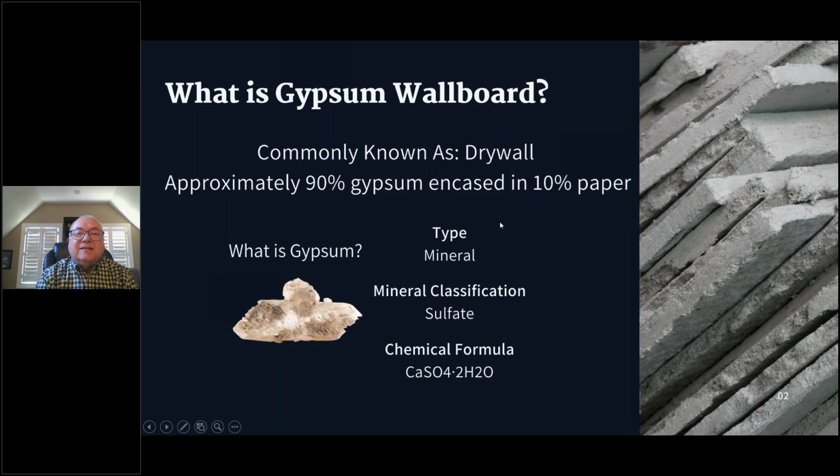So how much comes to our landfills? As I mentioned before, we have 3 landfills, of which the Southern Solid Waste Management Center has the most C&D material come to it in relation to the others, so I thought I'd present the information regarding that landfill. It serves the southern part of the state of Delaware. The total waste we received in calendar year 21 was 325,850 tons. Of that, C&D comprised about 108,710 tons, so roughly a third of the material we receive at that facility is C&D. The other 2 landfills in the northern part of the state receive between 10 to 15% C&D material. So that's why I chose this one, and this is the site that has posed us the most issues.

In 2015, we conducted a waste characterization study of just the C&D material coming to this landfill. The study identified that the gypsum content of C&D was about 7%, which would translate into about 7,610 tons in a year. We were only able to recover approximately 728 tons, a little less than 10%. I will go into further slides to describe what we do.

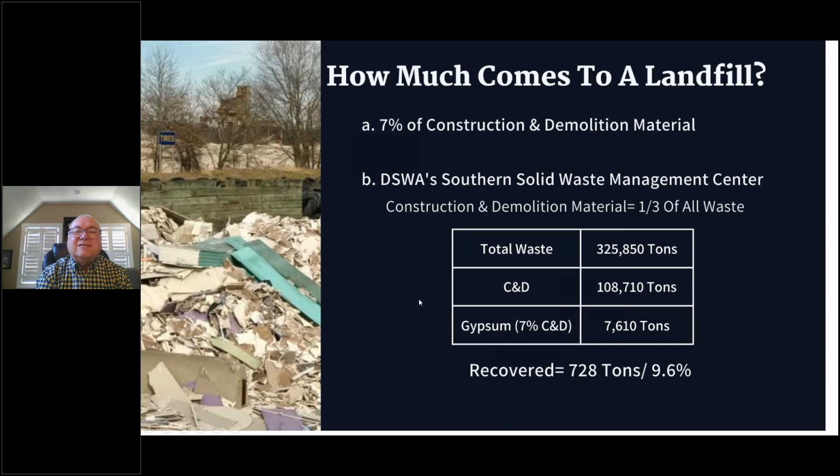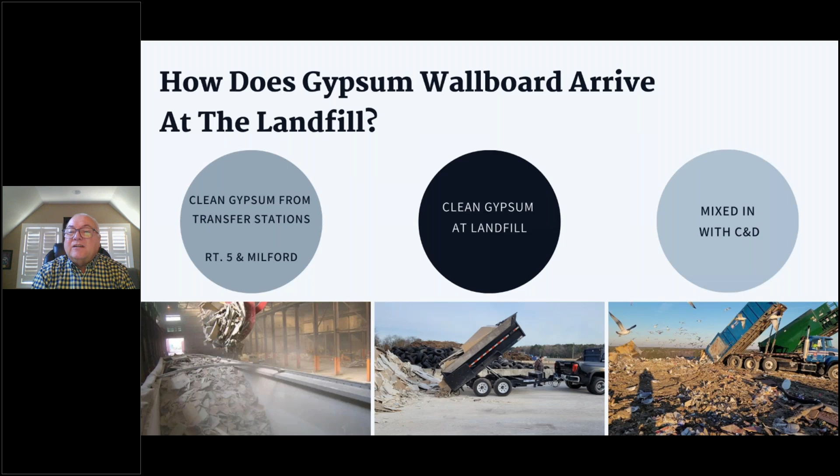But first, how does it arrive at our southern landfill? We have 2 transfer stations in the southern part of the state, and they receive clean gypsum. They have drop-off spots for just clean gypsum wallboard, then it's put into transfer trailers, and the trailers come to our southern landfill, where the majority of it is accumulated in one place to make it more efficient for shipping. The clean gypsum coming to our landfill directly is unloaded, as you see in the center picture. We will describe that a little bit more. The majority of it comes mixed in with the C&D loads, which are emptied directly on our landfill, as you see in the photograph on the right.

So, problems that it creates at landfills. A minor problem is that it takes up valuable landfill space. In the big picture of things, that's a real problem; we don't want to waste our landfill space on something that could be recycled. But the major problem is that gypsum in the landfill environment produces hydrogen sulfide gas, which is toxic, flammable, corrosive, and odorous. By landfill environment, I mean it's landfilled with MSW, and as you can see in the picture, it's very messy with all kinds of things in there.

In the landfill environment, there's a lot of moisture. When you're out in the open, it rains from time to time and that rainwater percolates down into the waste. You also have anaerobic conditions within the landfill. You have a lot of organic material; MSW contains a lot of organics, including food waste. And then you have bacteria. The combination of all those things produces landfill gas, and the landfill gas has hydrogen sulfide within it, which is toxic, flammable, corrosive, and odorous.

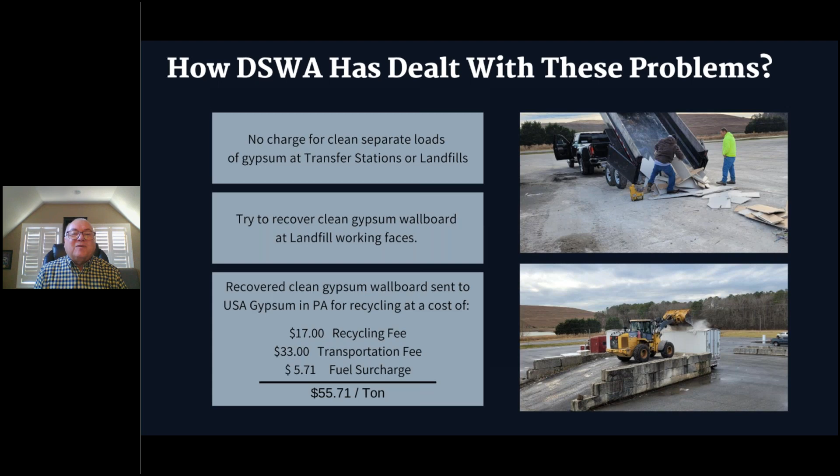Their facility is located in Pennsylvania. We're in southern Delaware. It's about 150 miles one way for that trip; that's why the transportation fee is on the high side. How else do we deal with problems? Well, we try our best to accelerate the collection of landfill gas, which of course contains hydrogen sulfide. In a typical landfill, you're going to be generating landfill gas anyway. When your municipal solid waste is decomposing, it produces it.

So accelerating it means that as soon as it's physically possible to install a landfill gas collection well, that is what we try to do. But you need to have a certain amount of waste in place to make it effective. Because if you put in a gas system and start drawing a vacuum on it too soon, too strong, you're going to draw oxygen into the landfill. And that's a dangerous situation, which could cause a landfill fire internally. So you have to make sure you've got a depth of typically about 20 feet of waste and soil before you can effectively draw landfill gas without drawing oxygen from the outside air into the landfill.

The other thing here is that we have a treatment system. Once we collect that landfill gas, which contains the hydrogen sulfide, there's so much of it that it's going to damage the engines and also cause a problem of excess air emissions from sulfate. We use a media, and the media we used in 2017 cost us $1.4 million, just the cost of the media, which is an absorbent to remove the hydrogen sulfide.

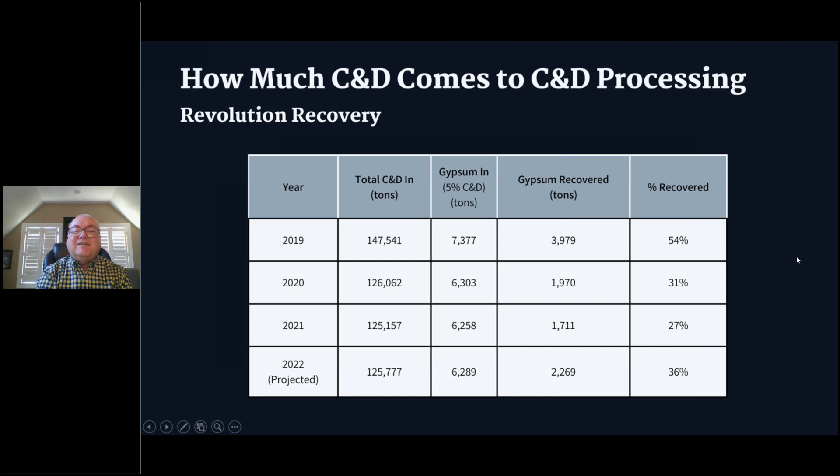And here's some most recent data from 2019 through present. You can see they process over 125,000 tons per year. When they've done an evaluation of their gypsum content within their C&D tons, you can see they have roughly 5%. And since they have a processing system with a lot of labor and equipment, they're able to recover a much higher percentage, still not as high as everyone would like, but still very good.

So how does gypsum wallboard arrive at their facility? Mostly by roll-off truckloads, as you see on the left. That particular one is mostly drywall, which is good. And it goes over to the area on the right in the picture. And what their process is, loads that are highly wallboard, that would be 30% plus wallboard, they put in a pile over there. But as you can see from the photo there, it's got a lot of other stuff in there that's going to have to be removed.

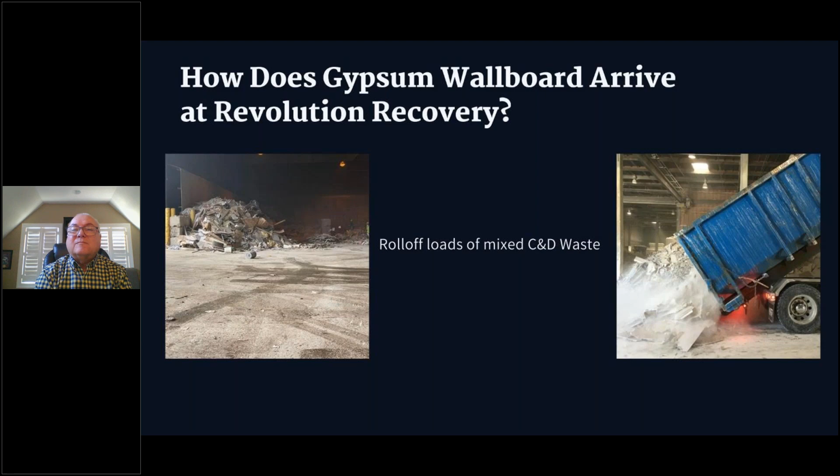And then for loads that have less than 30% wallboard, they process it just for their C&D operation. And it goes over on the right-hand side for a loader that puts it into a finger screen. It screens fines out from the bulkier material. It goes up onto the upper level there where we have hand picking of the recoverable material, a lot of wood, metal, and other items.

And it's very difficult to remove from mixed loads because in that mixture, as it goes over a finger screen, any wallboard that might be in there gets broken into small pieces and ends up in its fines. And when it goes into the fines, it's contaminating them and it limits the end markets for those fines. Many of the landfills don't accept contaminated fines for disposal, but there are a few that do, and that's where some of them go.

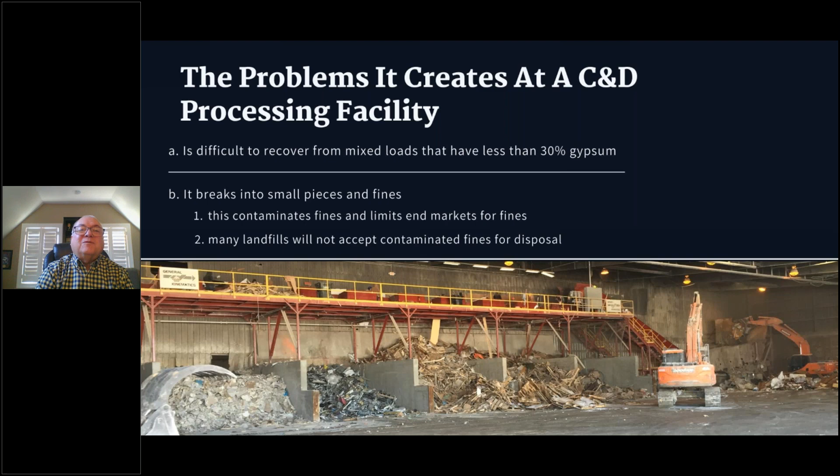On this one, like I said before, they only sort loads that have more than the 30% gypsum, and they encourage customers to pre-sort their loads and use a LEED program. The sorters here are on the floor, really a tough job to hand pick stuff out. And if they're short on sorters, they have to focus on the money generating material up on the platform that I showed in the previous slide.

So it's an economic burden for them because likewise, after they separate it out, this recoverable material has a cost to get up to a recycling facility, and they go to the same USA Gypsum facility in Pennsylvania as we do. And again, their main operation is trying to recover wood and metal and other things that have value. And so it's less desirable.

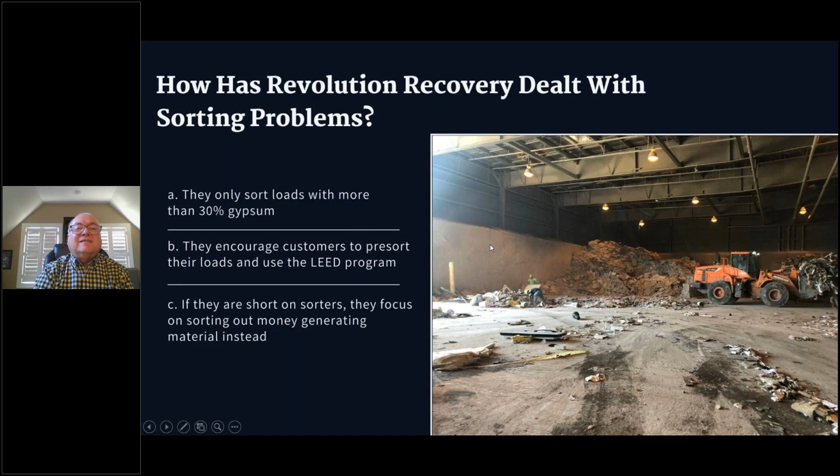And then Revolution Recovery, like I said, their best end market is USA Gypsum up in Pennsylvania. They're constantly looking for end use disposal markets for the fines. And some end uses can be used as a landfill capping material or a fill material, as long as it's confined within itself so that it's not exposed to moisture and organics and bacteria. It might be suitable for that, and it's on a case-by-case basis.

Disposals to out-of-state landfills with the fines mixed with all the other residuals is another method that they've found not as desirable, obviously, but that's what the current market shows they have to do. And then we get down to recommendations. How can we be better at this? Well, here's a few suggestions.

First is to require wallboard manufacturers to have a minimum percentage of recycled content in their wallboard. Another would be to require all new building construction to collect scrap clean wallboard separately and direct it to a recycling outlet. A third option, regardless, is to improve the infrastructure. We could use more transfer stations, or the existing transfer stations need to expand their floor space so that you could receive and sort the stuff.

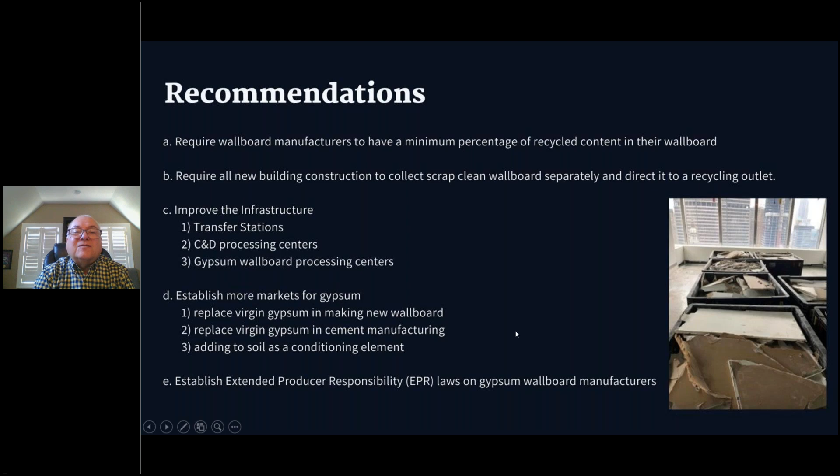And then lastly, the big one is establish extended producer responsibility laws for gypsum wallboard manufacturers. An issue with that too, of course, is that if you have individual states doing this, and we have interstate commerce going on, it's tough. Something like that, in my opinion, would be better if we could do regional or national things so that everybody would have a level playing field.

Another is the Construction Demolition Recycling Association. They have standard specifications for the production of recycled gypsum from scrap gypsum drywall. And then lastly, NEWMOA has a policy options white paper that's a good source of information regarding this subject. It's a little old, September 2010, but it is a good source of information. And I would encourage people who are interested in the topic to look it up.

And that's my presentation, and I'm ready for any questions people may have. Great. Well, thank you so much, Rick. And yes, like I said in the beginning, NEWMOA has been focused on C&D for quite a while, and gypsum wallboard has been a problem material for quite a while.

So we do have a few questions. One is sort of a fundamental one. If you could talk a little bit more about clean, like what do you mean by clean, and what other kinds of gypsum wallboard are there? Right. Yeah, this clean is just what it sounds like. It has nothing on it. It hasn't been used. So clean wallboard is from construction. So as a new home is being built and they're installing the drywall, they cut pieces of it to put up, and it's these scrap pieces that are clean that will come to us.

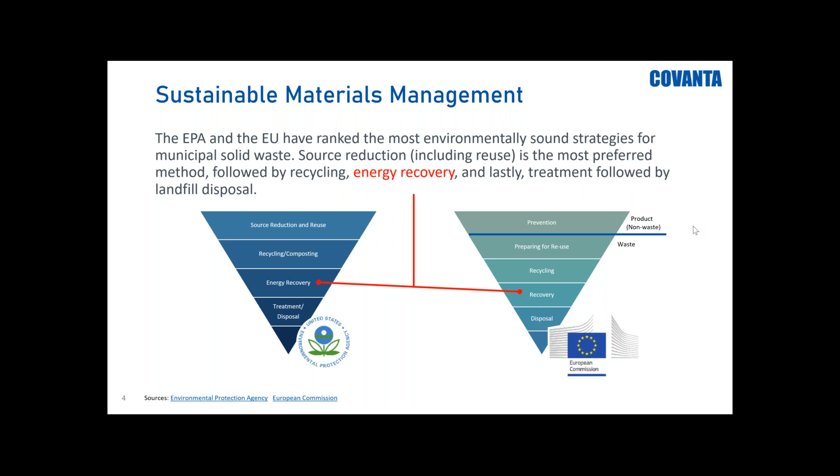This is the sustainable materials management hierarchy, showing what the US EPA and the EU rank as the most environmentally sound strategies for municipal solid waste. Source reduction, of course, which includes reuse. The most preferred method following recycling is energy recovery. And lastly, treatment followed by landfill disposal. As Rick alluded to in the last presentation, landfill disposal is still in many ways preferred in the US. We'll see that in just a moment.

The two choices for disposal: landfill, as Rick pointed out in the previous presentation. However, landfills are a major source of man-made methane. Methane is 30 times more potent than carbon dioxide. They do have leachate, as Rick talked about, and groundwater contamination can occur in older landfills.

It's not a sustainable use of the land, and even though there is a gas power production component, it's far less than waste to energy, which can take 1 ton of MSW and reduce it by up to 90%. It's a clean base load of power generation, and again, we recover metals. And what's not on here, oddly enough, we actually recover money, coins, and we're not allowed to resell those. They actually go back to the Federal Reserve through reverse auctions when available.

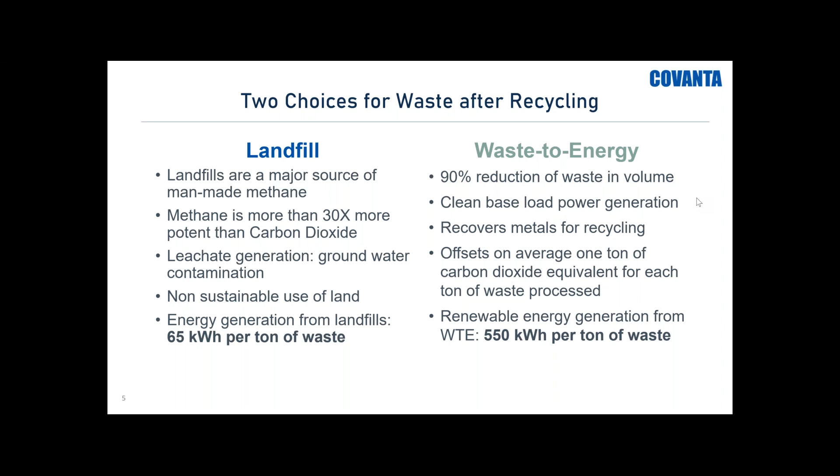So the U.S., how do we rank in terms of what we do with our disposal? And this includes C&D. The U.S. is primarily landfill. The EU average, you see the energy from waste and the recycling components eating into that preferred method of landfilling that the U.S. has. Denmark and Germany, as a percentage, overwhelmingly energy from waste, and that's driven through public policy in a lot of ways. But again, the U.S., we still have a lot of land out there, and landfill is preferred in a lot of ways.

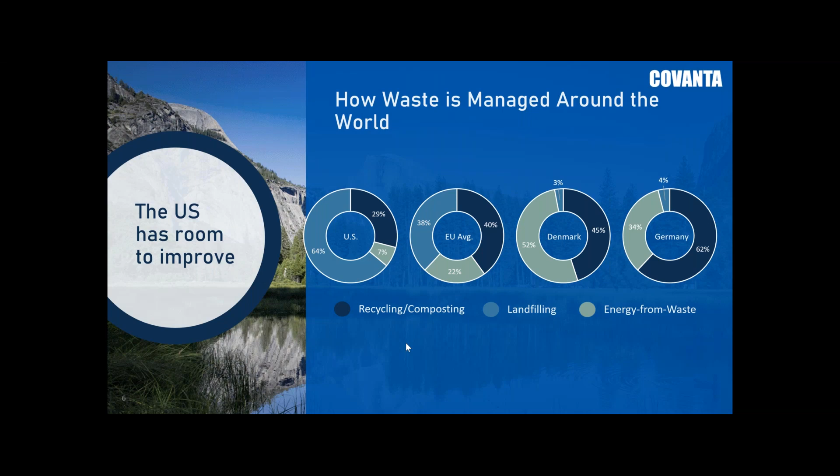Transfer stations support a lot of our facilities as feeders. We've got over 1.8 million processed tons annually. 900,000 of those enter through our transfer stations and then are redirected. And as it relates to the subject matter that we're here to talk about, it's interesting to know that we do not accept C&D at any of our facilities, with the exception of our Holliston transfer station. And like Rick had said, there's not a lot of places to take that. So at our Holliston transfer station, we actually truck that out of state to a certified facility that will take that C&D and process it to their specifications.

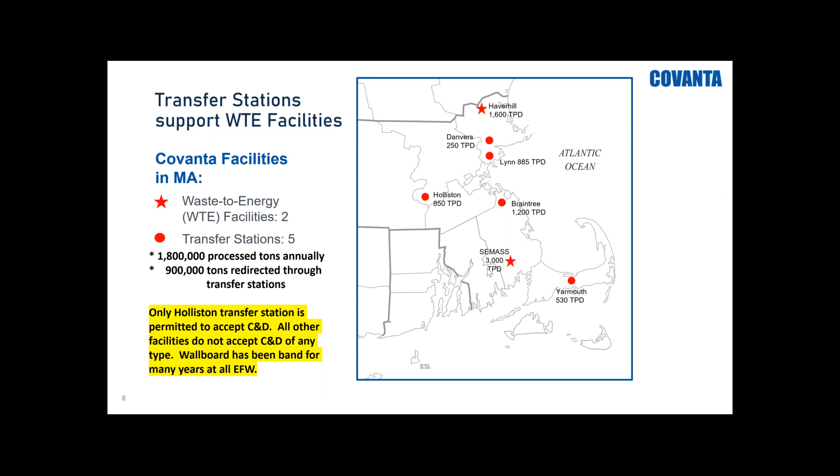Other than that, we do not accept any C&D, any wallboard, and it's been banned for a number of years for the reasons to follow. What's the main problem that we have with gypsum wallboard specifically? First, it's the sulfur content that Rick had pointed out. It creates SO2 emissions. In order to combat those SO2 emissions, we've got to increase our chemical reagent, in particular lime. Also, as Rick showed in one of his photos, it's dusty when it's all broken up. Other than the paper on the outside, it doesn't burn. It gets crumbled up and becomes particulate matter for us, dust.

All of that ends up in our ash and increases our ash cost. So it's a problem from the time it comes to us, which again, we do not accept it. However, in the market conditions out there today, dilution is the solution, and where they can't get rid of it, somehow it comes to our facilities, even though we prohibit it.

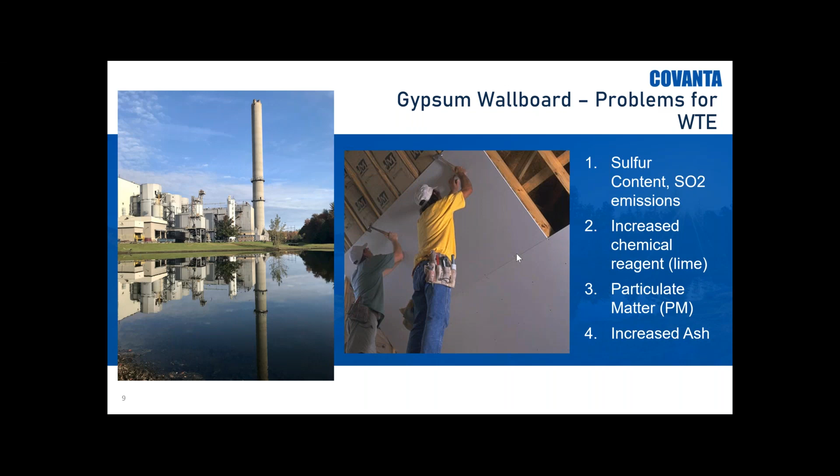Sulfur content, SO2 emissions. Gypsum wallboard is mostly calcium sulfate mineral combined with a thin paper coating, as Rick had alluded to. Sulfur in the wallboard directly increases our sulfur content in normal MSW trash. It actually adds to the sulfur content across the entire ton when mixed with MSW. Sulfur in the MSW is converted to sulfur dioxide flue gas emissions when combined with the heat from the boiler. Increased SO2 emissions are a real problem for us. SO2 is a regulated US EPA criteria pollutant.

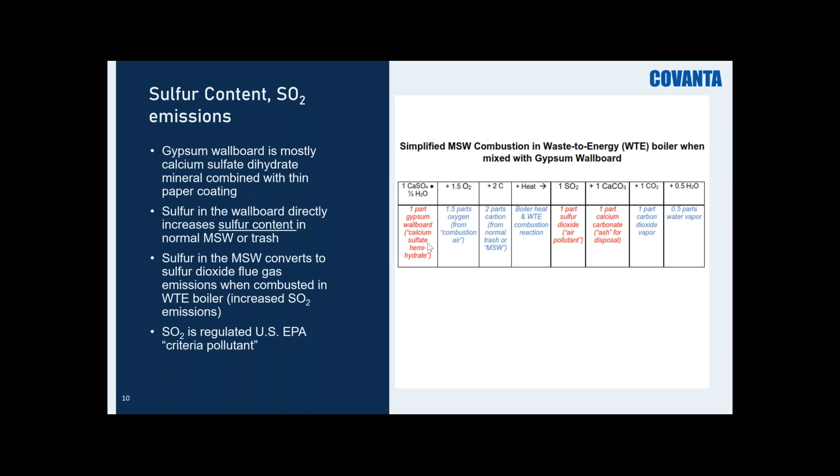The simplified MSW combustion, which isn't very simplified here, breaks down as 1 part gypsum board, 1.5 parts oxygen, 2 parts carbon, combined with the boiler heat and combustion, equals 1 part sulfur dioxide, 1 part calcium carbonate, and 1 part carbon dioxide vapor with 0.5 parts water vapor. Not very simplified, but that's the science behind it.

So at all of our facilities, we have CEM systems, a continuous emission monitoring system. And this is a full year snapshot of our SEMASS facility that does over 1.2 million tons of MSW annually, tracked at an hourly concentration. And as you see here, during our tracking, there's spikes. And for every one of these spikes, we look back to see what we're refeeding, what we're reprocessing, what came in during that time frame. And oftentimes what we find is not a clean load of gypsum, but heavy concentrations of pieces of gypsum, and more importantly, the powder in the middle between the paper, to where somehow that material came in and was fed in large batches.

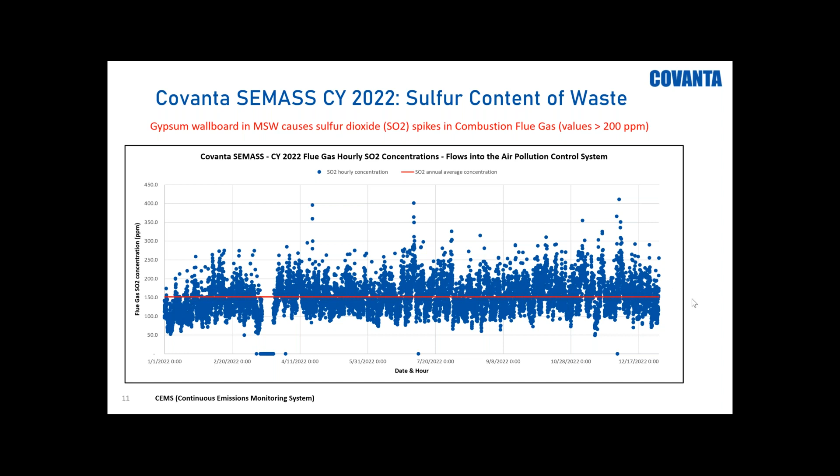It's not 100% attributed to wallboard, but it is a leading indicator that we're taking in material that could be associated with diluted MSW with wallboard and C&D components in it.

The increased chemical reagent, lime, what do we use that for? You'll see here that through the spray dryer absorber, we use that to scrub sulfur dioxide and acid gases out. You'll see the red line, the flue gases going in, and at the top it's creating a lime slurry that is encapsulating the sulfur dioxide and other acid gases, falling to the bottom, and is going to be collected into our ash system. From there, the flue gas goes to our baghouses at our facilities. I'll show you that here.

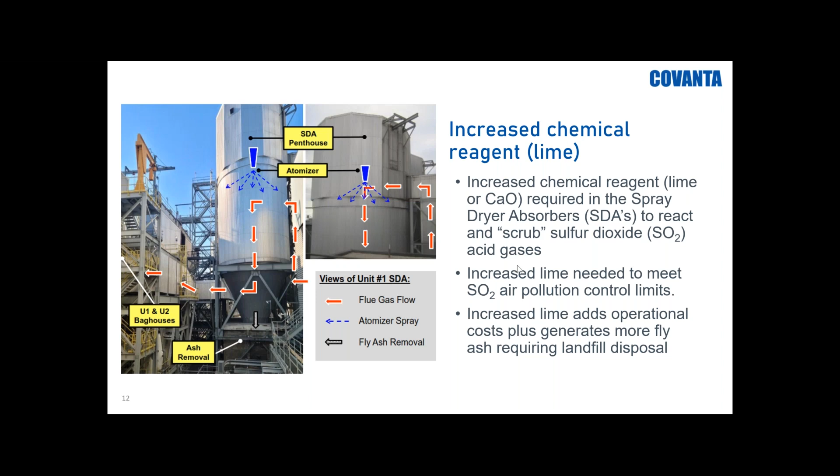This is typical of what a bag house looks like. These are just large steel framed boxes with hundreds and hundreds of large industrial, I'll call them vacuum cleaner bags, whereby the flue gas goes to the vacuum cleaner bags. Whatever particulate matter is in the flue gas gets stuck to the outside of the bag. The clean air, the flue gas without particulate matter, goes through the inside and then back out through our

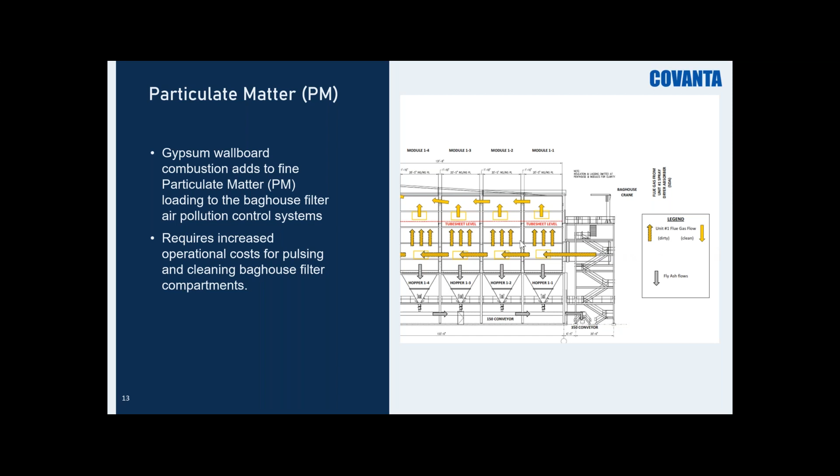stack. And all of that particulate matter that gets collected on the outside of these bags gets pulsated and vibrated and then falls to the hopper bottoms, and then gets conveyed out and is also collected with our ash. So we're creating ash to abate our environmental liabilities associated with wallboard.

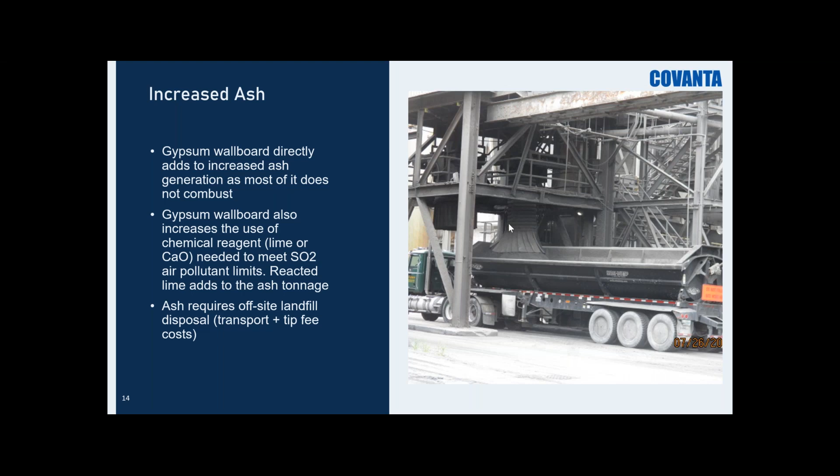So again, here's a shot of our ash loads. Gypsum wallboard directly adds increased ash generation, as most of it does not combust. Gypsum wallboard also increases the use of chemical reagent that we spoke about, and ash requires off-site landfill disposal. There's a tip fee and a transportation cost. There's also a long-term liability cost associated with ash disposal.

So what do we do about it? Promote C&D recycling diversions and facility siting. We'd love to see more C&D facilities, processors in the Commonwealth or around the Commonwealth. Work to restore market balance in the C&D world. C&D processing and recycling should be cheaper than MSW processing. I think in Rick's slide, I thought it was very interesting that clean was almost free, if not free, versus mixed was expensive. So working to restore that market balance makes sense.

Working with C&D generators, haulers, processing facilities, outreach, inspections. As you can imagine, we have daily, weekly, monthly inspections internally and externally, and yet we still see this waste coming to us. In many ways, it's coming with roll-off trucks, as Rick had indicated. But moreover, we're also seeing it in mixed loads of 100-yard transfer trailers, which is very hard to catch that C&D, and in particular the wallboard, after it's already down to 6-8 inch chunks and mixed with 25 tons of trash.

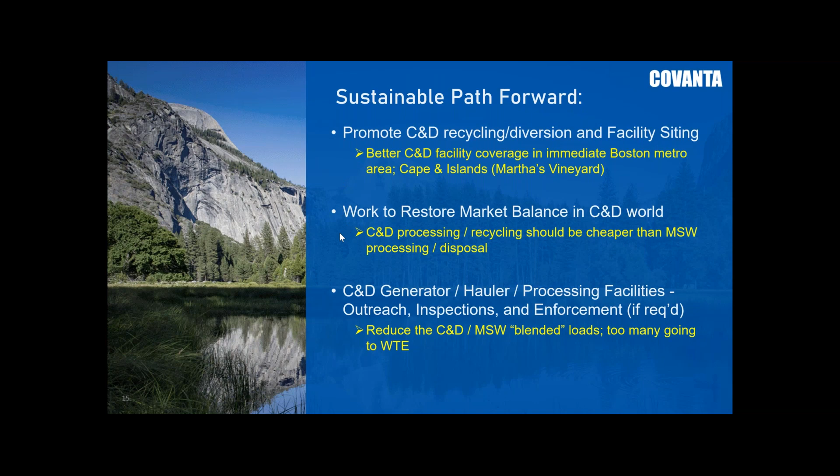But we do it every day, and we will continue to do so, hoping that there'll be more solutions along this notion of having more places to go that are hopefully closer. And that's what I have for today.

There we go. Okay, there we go. Thank you so much, Mark.

I am not seeing any questions specific to waste to energy here. So does anybody have any questions more about what happens at waste to energy facilities? So basically, you all don't want it. You say it's not allowed, but it still comes in, because it's mixed in with other stuff, and with demolition and renovation projects, and maybe even some new construction, it can get made into smaller pieces. It doesn't come as a big board that you can easily identify. So please don't bring it.

So let's see, here's a specific question. When you see a spike, do you try to go back and figure out where that waste came from, and then get on those people to not do that again? I would say when we can, and when we notice that in real time. We actually have cameras and we can go back and review. We'll look at the actual pit or the floor volume to see if the material has substantially changed. And then if we know, based upon that location and where that waste was that day, we can go back through the cameras and look.

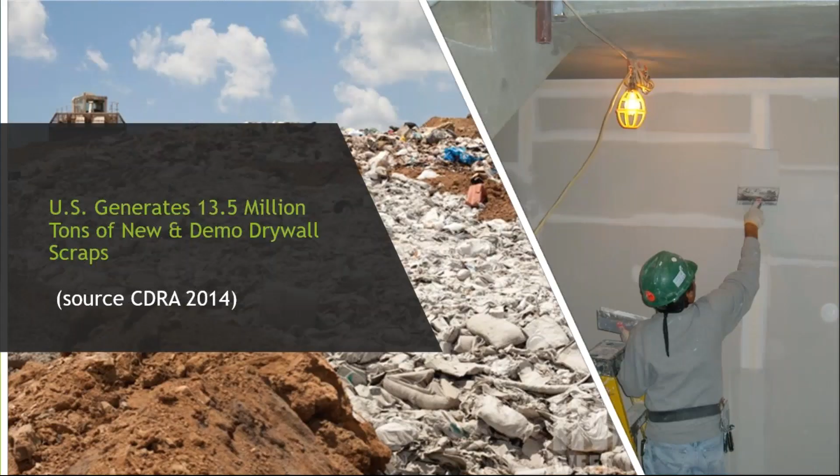So it's always interesting to try to figure out how much drywall scrap there is out there, and I could find various studies to support a wide variety of volumes that I wish to recommend as reality. But the CDRA did a deep dive with University of Florida back in 2014. And that estimate was 13.5 million tons of new and demolition drywall scrap.

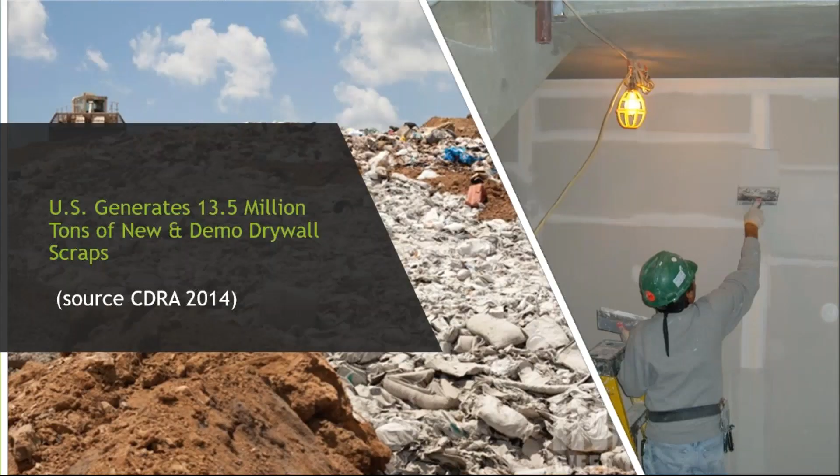So if we jump back a minute, whoops, I went the wrong way. If we jump back a minute and we look at that 42 million ton supply, 13.5 million tons of waste going into landfill could have a significant impact on that supply if it could be reclaimed.

Let's talk about gypsum drywall volumes in the Northeast. I think the most reliable way to evaluate them is look at how much drywall is sold into the regions. The USGS combines New England and Mid-Atlantic together for the NEWMOA states, and Pennsylvania falls into that even though it's not a NEWMOA state. So combining the two, there's 3.23 million tons of new drywall that were sold into the New England Mid-Atlantic states in 2021.

If we subtract Pennsylvania out, I think we're at about 2.58 million tons for the NEWMOA states. And if we use a 15% waste factor, that would come up to 387,000 tons of new drywall scraps that are generated from the NEWMOA states.

So another important question is, well, how much demolition is there? And I'm not even going to project an estimate here because there's really not much reliable data. Some of that's because of how the waste is generated and handled. And there's just nothing out there, but I think it would be fairly safe to say that it would be at least equal to the amount of new drywall scrap that's being generated.

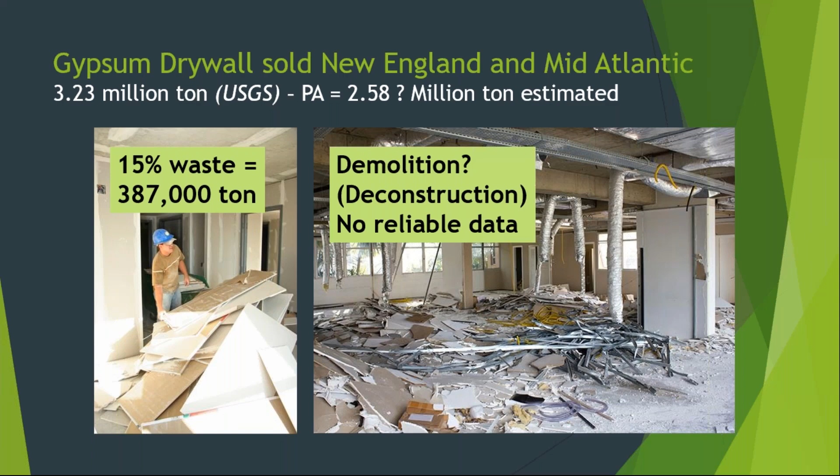So how did I come up with these different numbers? Well, I took the total amount that was shipped and I broke it down by population, and in that chart you can see how much that amounts to on a population basis for each individual state, and then totaled that out. So there again, that's where the 387,000 came from, rounding my number to the far right in the bottom.

And based on that, we pulled about 5,000 tons out of the NEWMOA states in 2022. So if my estimate is even close to being correct, we could be at a 1.3% recycling rate on the new drywall scraps being generated in the NEWMOA states.

It's interesting to note that the NEWMOA 2010 study, which is a great study, estimated the Northeast at 720,000 tons of new scrap being generated. And their method was using a waste characterization study and then spreading that out across all the C&D tons that were reported. So that was their methodology, and obviously you can see that it's nearly double the amount that I think is a fairly reasonable estimate of the volume.

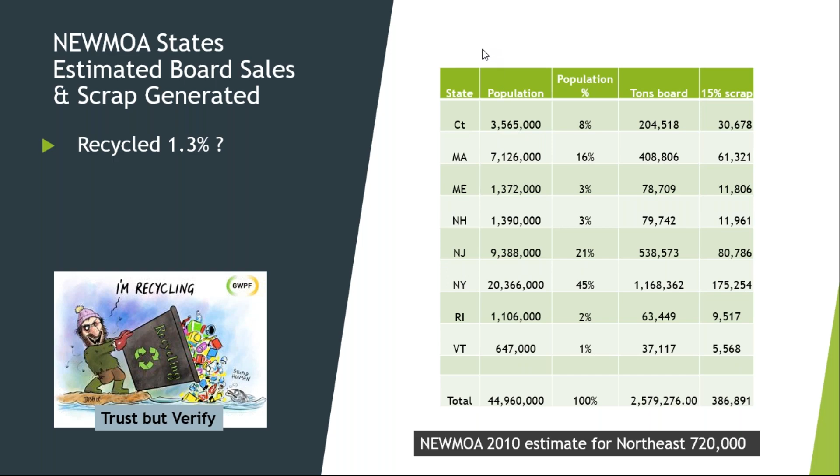Jennifer, can you hear me? Yes, I can hear you. Okay, my screen froze here and I can't move. I may need to go out and come back in. Well, or just try clicking on your slides and then maybe you can move them. Oh, there we go, thanks for your help. Okay.

So what about the drywall scrap outlets in New England or NEWMOA states? We've been in business since 1998, although we weren't operating particularly in the northern states. We were probably over in New Jersey early on, but we had Gypsum Recycling America open up in Boston back in, I believe, 2006, who couldn't make it work and exited the stage, unfortunately, back in 2010.

We started pulling drywall out of the NEWMOA states pretty aggressively around 2010. And I have a note here that Washington State on the West Coast, with a population of 7.9 million, recovered 54,980 tons back in 2018.

And I know you might be wondering why I would mention Washington State when we're talking about NEWMOA, but interestingly enough, Washington State has about the same population as Massachusetts and less than the combined NEWMOA states. So the other interesting thing is that they haven't been compiling data since 2018, but industry sources tell me that drywall recycling there is alive and well.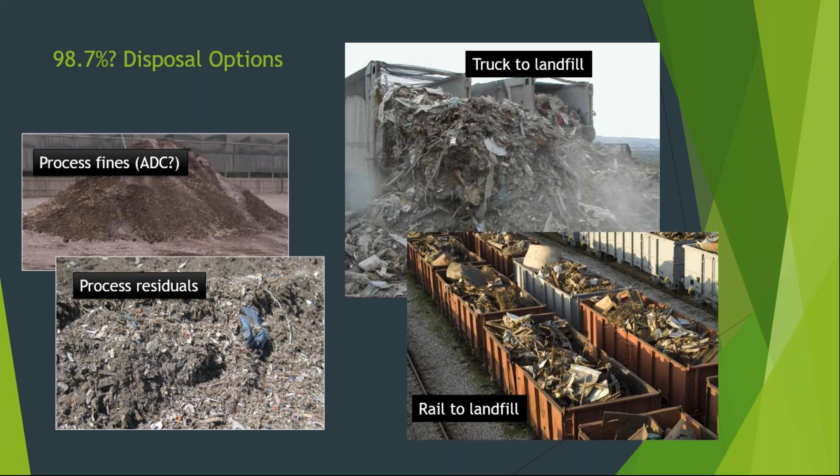In the states where processing isn't required, some of it may go directly to a landfill, and by truck, it's probably going to New York. By rail, there's a significant quantity going to C&D landfills in Ohio. So I was asked to talk about what policy options there would be that would improve the recycling rate and kind of get things rolling again.

I went back and reviewed the NEWMOA 2010 white paper, and I recalled that it was a good paper, but I reviewed it again, and it really is a good paper. And they had five recommendations within that study. The first one was banning disposal. The second one was requiring recycling in state-financed projects, and then required waste management planning, common terminology and reporting, and implementing extended producer responsibility.

So a few of those have been done by a few states, so it's a patchwork. We do have some bans for disposal. I could have put in parentheses behind that / enforcement. I'm not aware of any states that are requiring recycling on financed projects, but it's possible that I'm not aware of that. Requiring waste management planning, I think that's a missing component.

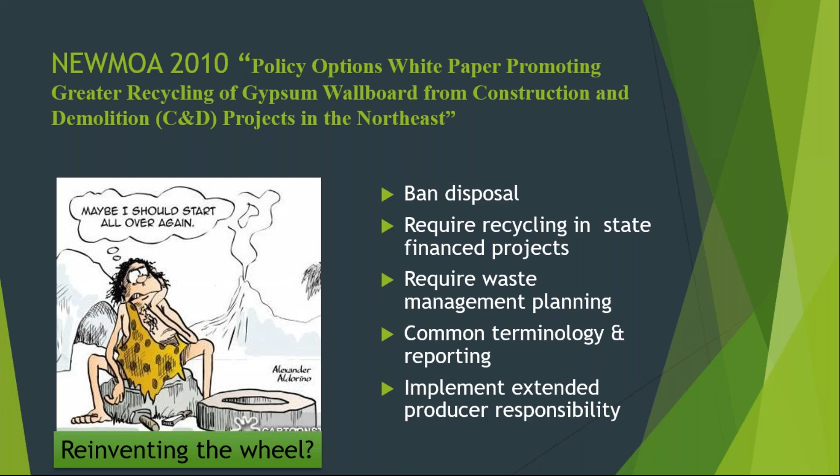If we look at Washington State, they've tied permitting and having to post a bond and then return results on how much they recycled, and they combine that with a disposal ban, which they're pretty aggressive about enforcing, and that seems to have generated a better result. So after reviewing this again and thinking back that this has been now 12-some years, I had to bring up the little cartoon about, maybe we should start all over again. And so in some fashion, we're trying to do that.

There's more interest now in recycling gypsum drywall than there has been in the past. So the CDRA agreed to set up a gypsum drywall recycling committee. And one of the first things we did was come up with this logo. And what it shows is all the moving parts that need to happen, starting from the inputs of water, recycled paper, and gypsum, the various sources. Then we have manufacturers, distributors, points of waste generation, which are deconstruction and construction, and then the recovery, sorting, and finally, hopefully, reincorporating it into recycled products.

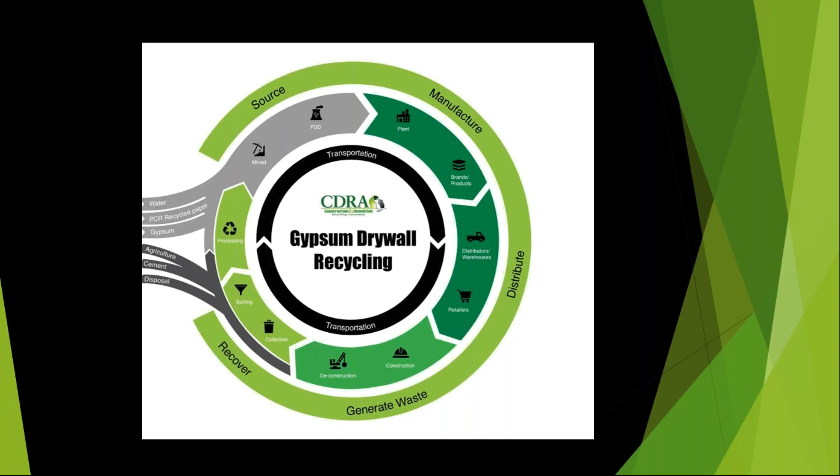But unfortunately, much of it's still going to disposal. On the inner circle, I just want to point out one of the most important parts to gypsum manufacturing, recycling, or gypsum supply in general is transportation, and that's a barrier that's difficult to overcome.

So I'm proud to say that this group of stakeholders, and there's a variety of stakeholders. We have several of the manufacturers themselves, the Gypsum Association, some of the largest construction companies in the United States, the handful of us recyclers who are actively engaged are a part of it, and the CDRA contracted with the University of Florida to help us compile the information. We really take a deep dive into drywall recycling, and for anybody who has an interest, I would encourage you to look at CDRA for a copy of this report.

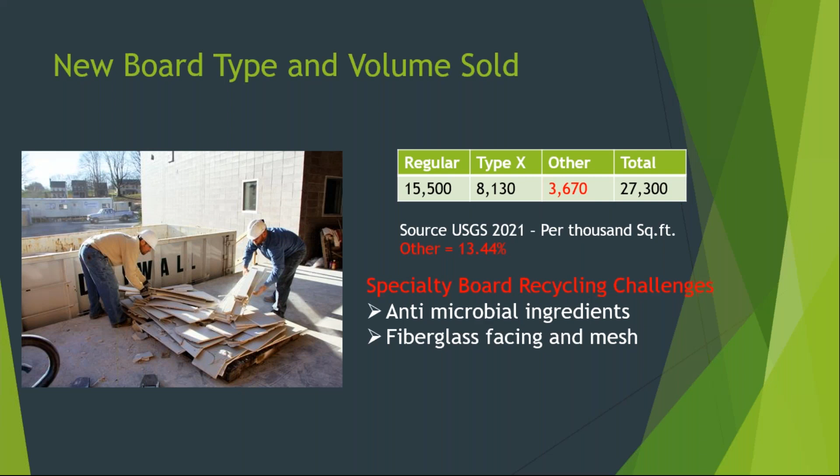So some of the things we deal with in this report are the new board types and volumes, what should and could be recycled. So the vast majority of drywall scrap is either regular or type X. That's readily recyclable in almost any market. However, there are specialty boards that amount to about 13.5%. And some of the concerns there are the antimicrobial ingredients and fiberglass facing and embedded mesh in some of the other specialty boards that take special consideration, both from a process and an end market standpoint.

Then we really took a deep dive into demolition gypsum drywall, and really we don't like calling it demolition, we like calling it deconstruction, because when you say demolition, a lot of people envision a wrecking ball, and if you're going to successfully recycle drywall coming out of an old building, it's going to need to be deconstructed carefully.

Some of the concerns are asbestos and joint compounds from years ago, lead-based paints. And then just generally, deconstruction drywall tends to have more contamination, meaning incidental foreign material contamination. And then if you're in the recycling business, you need to be sure that you understand your markets and the regulatory requirements that may limit some of the incorporation of gypsum recovered from deconstruction drywall.

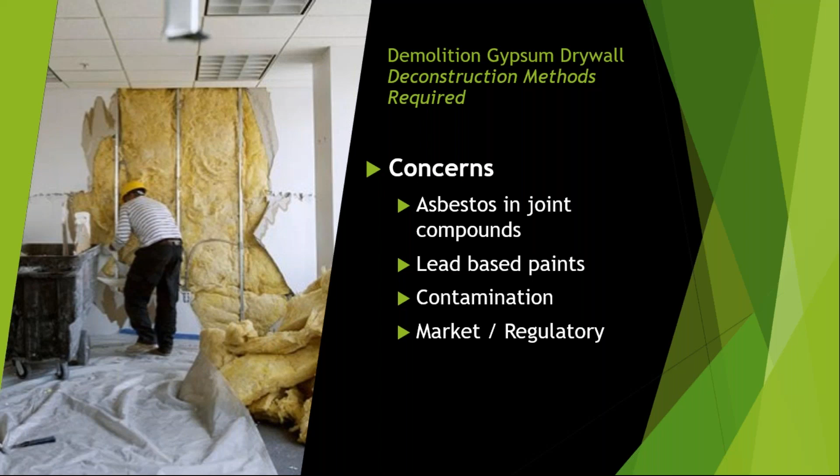I'm not going to spend much time on this mixed C&D processing because Rick did a great job of describing this in more detail. But basically, if it comes in mixed loads, it's just very difficult to do a good job of pulling a high percentage of the drywall out. It gets crushed through the weathering outside, bringing it into pile mix, and then pushing it up.

In the upper left corner, for those of you who have a screen and can see it, there's a track hoe picking through some drywall. There's a guy in a high-vis suit down there who's trying to help him pull drywall. And you need to have space, and you need to think about the labor and then the safety issues.

You have very limited success in pulling enough drywall from a sort belt after it's been on the tip floor. I've had several people try it, and they just didn't have enough identifiable drywall up there to justify the labor and the space requirement that it took to pull it off the conveyor belt.

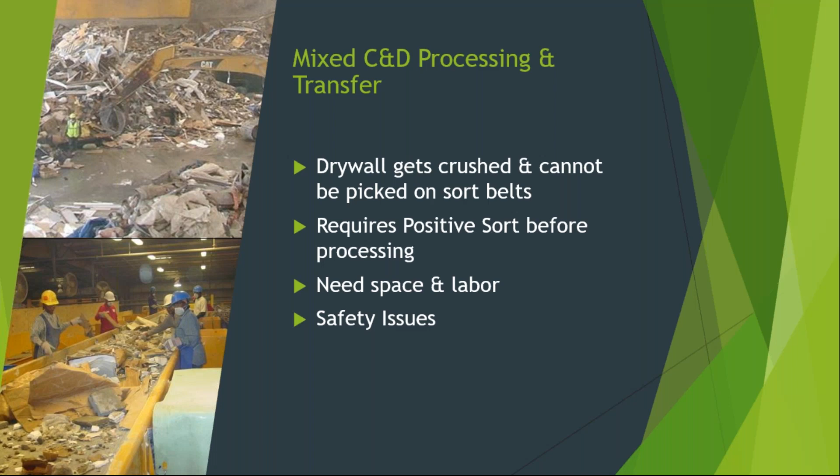So really, I think the whole industry agrees that source separation where the waste is generated is the best solution. And so in many cases actually, you can set a separate dumpster there, and if you can monitor it and control the crews, you can put clean drywall in, take that to a transfer point, hopefully where it can be transferred for recycling.

I think one of the reasons that Pennsylvania has a high recycling rate is there's been a strong adoption of specialty carts being used at the construction site. And so that material is source separated as it's generated, put into those carts. And those carts aren't emptied until they go to the transfer station or the C&D processor.

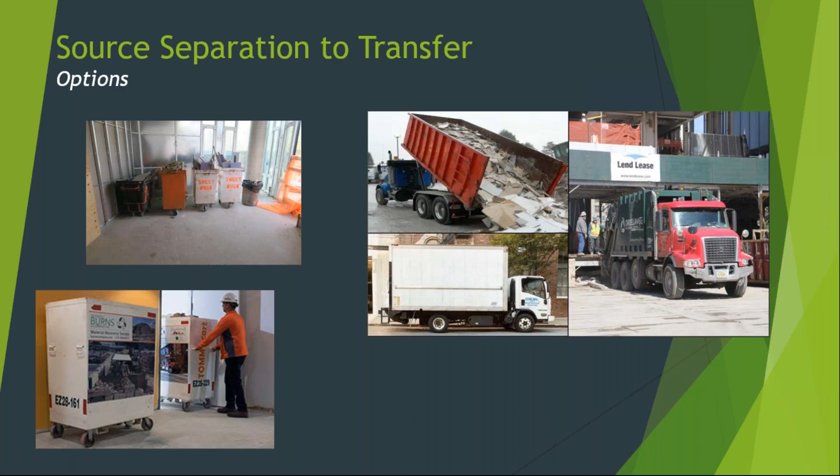So there's all that drywall out there, and there's a market. So if we did a good job of collecting it and recycling it, do we have markets? Well, the answer is yes, we do. The cement market's 4.4 million tons a year. The agricultural and miscellaneous is 15.5. And new drywall manufacturing is 22.8 million metric tons a year in 2021. So there's a market there.

But some of the considerations you need to be thinking about as we look at these markets is, first of all, the big one being closed loop back into new drywall. We're doing some of that and have been successful at it. Some of the things that need to be considered is they're usually very sensitive to paper content. Particle size and moisture requirements may vary according to the facility and their mechanical feeders and storage capacities. They're going to be sensitive to specialty board that may be incorporated into it.

You're going to need extensive analytical data. And the industry has generally not agreed or refuses to accept any material that may have been generated through demolition or deconstruction due to the sensitivity and the legal risk associated with asbestos. The industry has a historical issue there, with many of the manufacturers having gone through bankruptcy years ago.

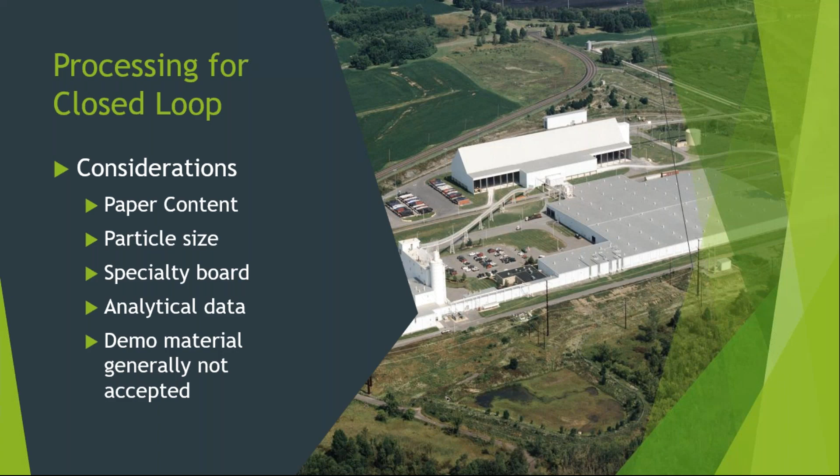For agriculture and miscellaneous markets, they're actually varied. Some of it can be direct land application. It could be animal bedding. It could be for gardens, and understanding the different particle sizes, moisture requirements, analytical data that may be required. Some states regulate any kind of a waste going onto the soil very carefully. Almost all states require a license for any type of fertilizer material going on. And the agricultural markets tend to be very seasonal, which can be a challenge.

So we have another important market, the cement and masonry. They also usually are very concerned about paper content. So we need to talk about doing a good job of removing paper from the gypsum drywall. Each plant may have different requirements for particle size and moisture that they need there, again, because of storage, feeders, and other mechanical limitations that might exist. And they're going to look very carefully at the analytics.

Every drywall recycler who's separating the paper facing from that gypsum core, which is important, needs to have an outlet for that paper. So markets that we deal with are animal bedding, some composting, waste solidification. Over the years, we've done some ceiling tile incorporation and back into cellulose insulation.

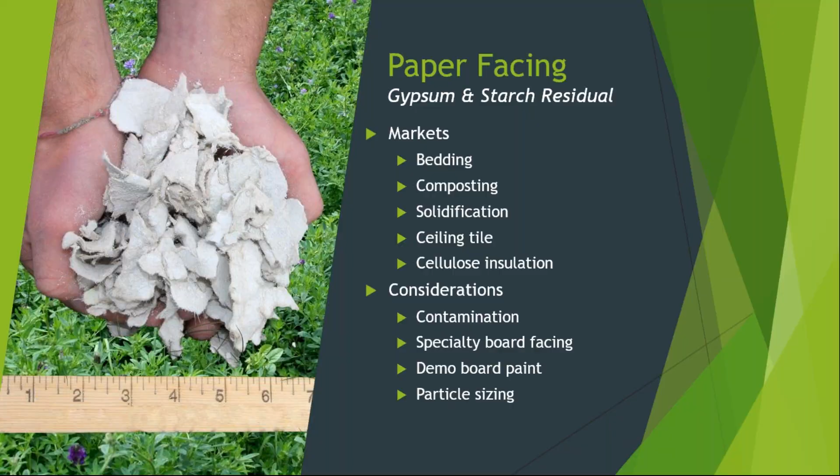So why can't we make this happen? Why isn't it happening? Well, any manufacturer out there that is going to agree to use the material is probably going to want a steady volume. He's going to want consistent material. And if we're talking about back into new drywall, a typical plant uses 500,000 tons per year. So if I approach them and say, well, I have 5,000, they're probably not going to be too interested in making changes to their system to accommodate 5,000 tons of gypsum a year.

A cement plant is typically around 45,000 tons. And there too, most of them are going to want to blend recycled with other sources. And so they're going to be concerned about having a regular supply. And then agriculture, we deal with lots of farmers who generally take smaller quantities, and so it's easier to fulfill their needs, but they are seasonal, as I mentioned before.

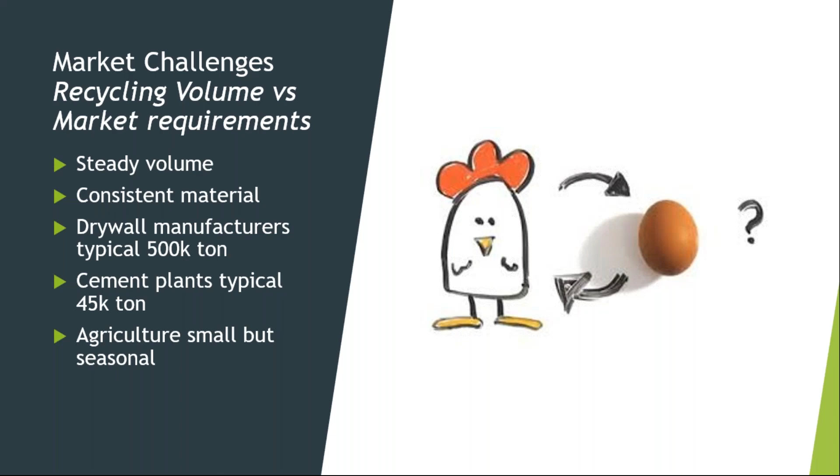So that was a deep dive that CDRA took into recycling drywall, and there's lots of information, almost 50 pages, including requirements for analyticals and all that sort of thing. We hope that'll help to move drywall recycling forward, not just in the Northeast, but across the United States. And so I'm excited to see what the next decade brings. We're here and we're able to recycle what the industry is able to collect and send us. So thank you. That's my presentation.

Great. Well, thank you so much, Terry. And I think you're a little modest. I think part of the reason why Pennsylvania has a higher recycling rate is because you're there and all the work that you're doing. So that's great. So there are some questions that have come in.

So people are wondering why some demolition and renovation wallboard is not recyclable, because not everything is so old that it would have asbestos or lead paint. You know, a lot of renovation and demolition happens on things that are newer than that. Or could people do some testing and then still send the material for recycling? So there are several questions within that question, and I'll try to address them.

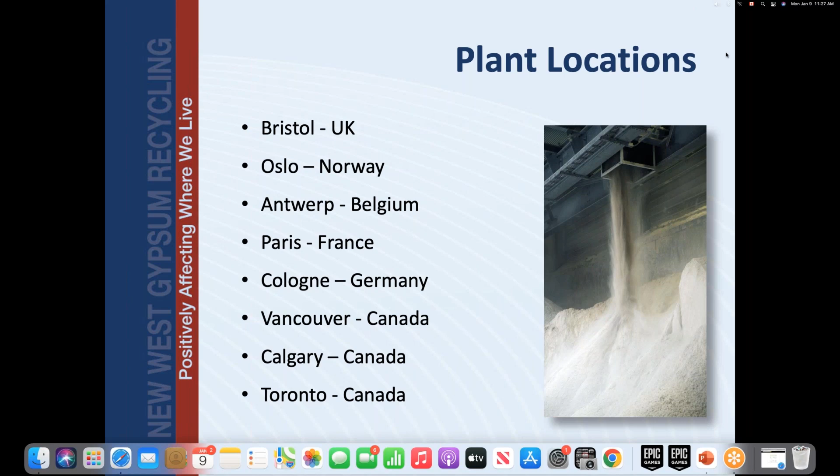This is basically all the places that we're based. And I just want to point to our slogan, positively affecting where we live. Wherever we go, we want to make an impact, and one way of doing that is to be able to recycle wallboard. Basically, how do we do that? Drywall recycling is just separating the paper from the gypsum core so that it can be used in new manufacture of drywall. We tend to offer a transfer station, so we have a tipping fee as our primary source of revenue, and the tipping fee varies from location to location because there are many factors that go into determining what that is.

Typically, when we go into new areas, we don't offer a bin service because we want to work with all the local waste companies to be able to throw out the biggest net that we can to capture as much drywall as possible. We are a processor, not a waste management company.

We typically work directly with manufacturers to be able to process all the gypsum waste that they need to meet their demands, and in turn we're able to take it from the market to help them offset some of their costs if they have high rock costs, or maybe they want to offset some of their waste costs. They're able to do that.

We fabricate our own equipment. We meet all the world technical and safety standards, but we do not sell our equipment. We are basically a service-based company. We do provide turnkey solutions and develop agreements with all the different scrap suppliers, different supply agreements with end users, whether it's what Terry alluded to earlier, if it's manufacturer, cement, agricultural.

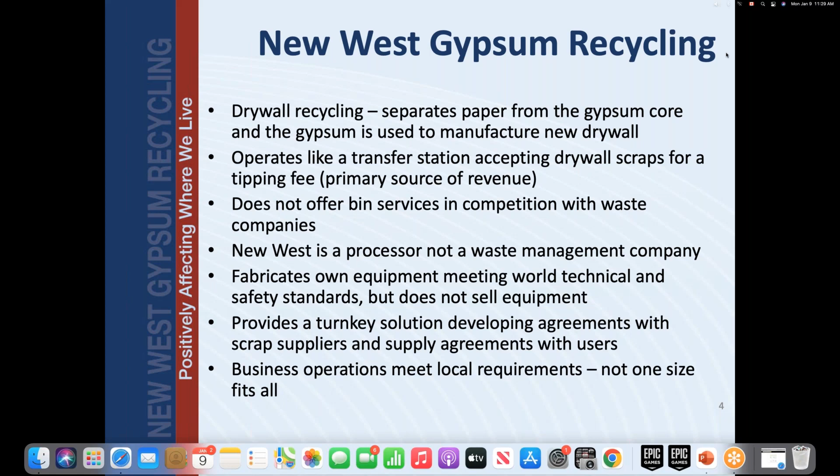Some of this has been touched on before. There's many sources of gypsum rock. It can come from mines locally, but more often than not, they're from overseas, like the Middle East. A lot of the rock, I believe, coming in to North America is coming from either Nova Scotia or Spain, just because the manufacturers need to be able to source the material well out in advance, and sometimes it takes the permitting process to open new mines or expand mines. It can be a very lengthy process.

Then there's costs, right? It is a commodity at the end of the day, so you need to price your recycle against whatever other commodities are in the market. And the big hurdle is always going to be transport. The farther you have to go, the more expensive it's going to get. Fuel prices are rising, so it's harder to be able to collect it just through the sheer cost of transportation.

So quantities vary with the purity, and non-gypsum constituents basically that the natural gypsum may have clay or other heavy minerals. Synthetic gypsum from coal-fired power plants may have more heavy metals, but it's a cheaper material for the manufacturers. For one, they don't have to transport as far, and it's a byproduct from coal-fired power. So it's a good alternative because this material would be landfilled if the wallboard industry didn't use it.

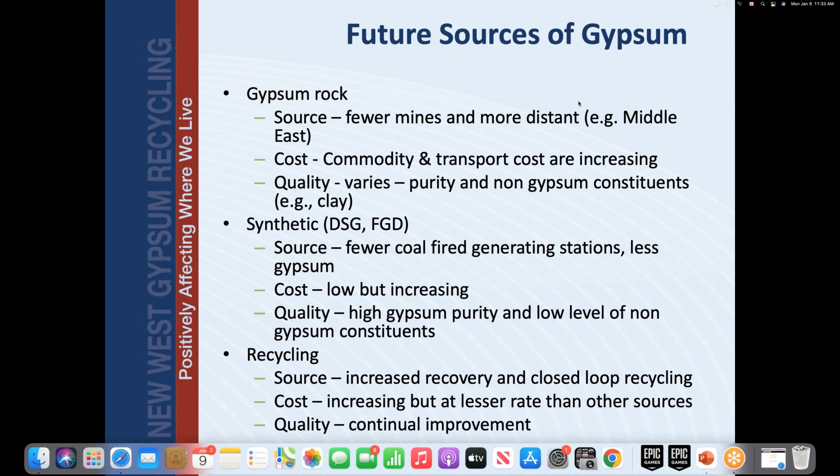And then naturally quality is a continued improvement because there's lots of different things that can affect the quality of your recycle. I'm going to break it into 2 categories that we have: dated material, which is normally considered 1990 or newer, then non-dated material, which is 1990 or older. Typically with the non-dated stuff, you can have risk of asbestos, lead, and other impurities. And once it's newer, you run less chance of crossing those hazardous materials.

Now, this is our collection method. Typically we do process the manufacturer scrap. Typically when they start a line, they'll generate what's called wet waste. This is the very beginning of their line when they're basically sandwiching the gypsum between the 2 bits of paper. There's always a little bit that's going to end up as waste. So we're able to process this very wet material.

Then occasionally we'll get stacks of board that may have been damaged in the warehouse or product that has not met the proper specification to be sold. So we would also process these materials, but the vast majority that we process actually comes from the public.

The public for us is a lot of the actual board applicators themselves. Typically, if we're going to get material from a transfer station, we actually require them to segregate that on another part of their site so there can't be a risk of any cross contamination. Essentially, they're just a bulking transfer station. And we also do get the everyday people. Sometimes people come down with a small little cardboard box that's been sitting in their garage for years. They're able to bring it to us for recycling. So then it comes to us, then basically 95% of our product will go to the manufacturer.

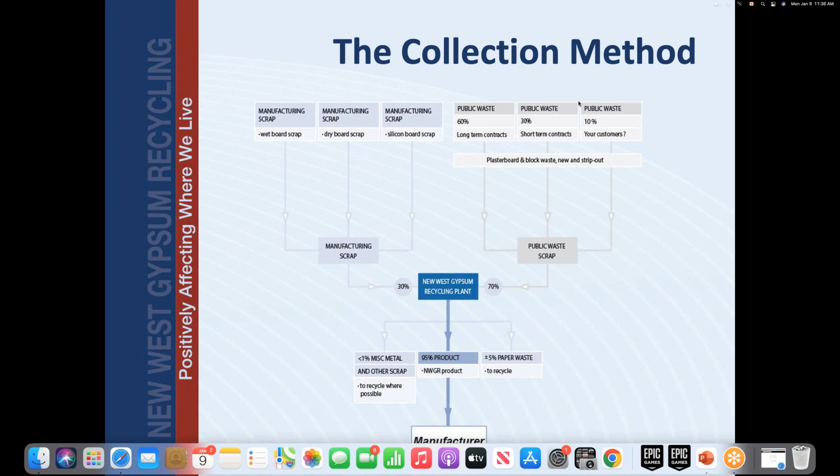Some of the drivers: basically, we were born from a landfill ban. British Columbia, Metro Vancouver, back in 1984, banned drywall from their landfills because it was creating too much hydrogen sulfide gas. And at the time, my family was in the demolition business. So we transitioned from a waste company to being a recycler. So there's opportunity when you create bans. But if you're going to put a ban in place, it really needs to be thought out, and you need to include all the stakeholders in the decision making.

Massachusetts has a partial ban. This is great because it's focusing on the material that definitely can be recycled, and it was known as clean gypsum board, which is the offcuts, non-painted material. And typically you can flip that board over and it'll have a date stamp on the back, so the recycler will know when that board was made.

Over the years, there's been a lot of work done towards legislation, especially in the EU. So they have basically narrowed their definition of waste. So each member state now can look to this criteria and be able to use what is now best practice. And Germany has their own; each member state does their own thing, and the European Union is more or less like a guideline. It's kind of like state and federal level, or province and federal level.

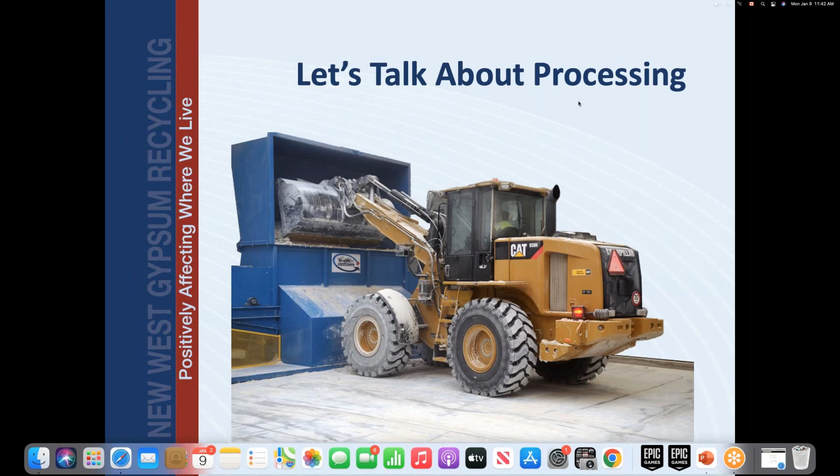So let's talk a little about processing. Basically, we receive loads. We use our loaders to be able to break it up a little bit. We put it in a feed hopper. We have only one guy, and he's there only to inspect the belt. So if there's any contamination that's on the belt, he should be able to pull it off, because our loads are clean to start out with because we've educated our customers.

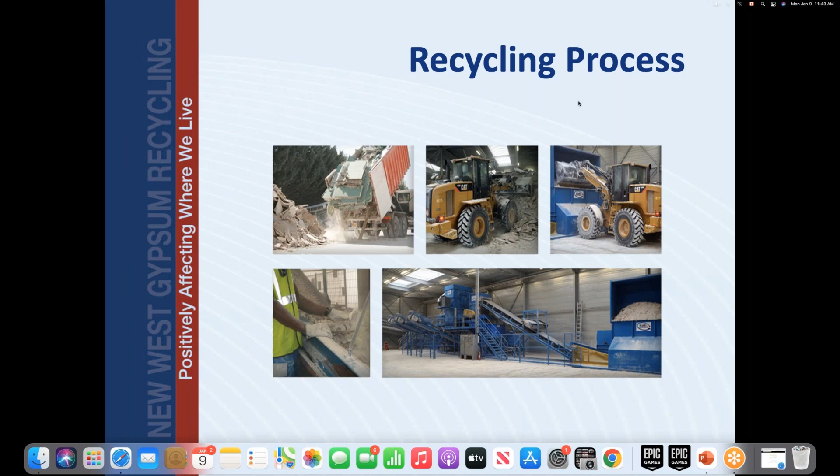So I don't need 5 to 6 guys on the sorting belt pulling off wood, metal. I just need one guy just to inspect it, just make sure that nothing will go into my system that will hurt it, like concrete, for example. So my inspector is there more or less to protect my equipment more than anything else.

Okay, now I've touched on this, right? You need a clean source of gypsum, right? A lot of times there might be tile on the board, or there might be some metal flashings on it, right? So you need to take care to remove all that.

And also you need to have inspectors for asbestos contamination, especially here in BC, because our work authority actually requires us to ask for a lab result for a negative test before we're actually allowed to accept it. So this is why we have dated and non-dated material. If it's non-dated, we're going to ask for the lab result. Then if it comes back negative, we'll take it. And if it's positive, then we don't even accept it. They need to go to an abatement company to have that material dealt with.

Our processing equipment, it doesn't matter how wet it is, because we developed equipment that can really handle wet material, because a lot of times when gypsum is source separated, it's sitting out in containers. Sometimes it's sitting in the rain. Sometimes if it's on someone's site, it's not covered. And also we need the ability to process manufacturer waste.

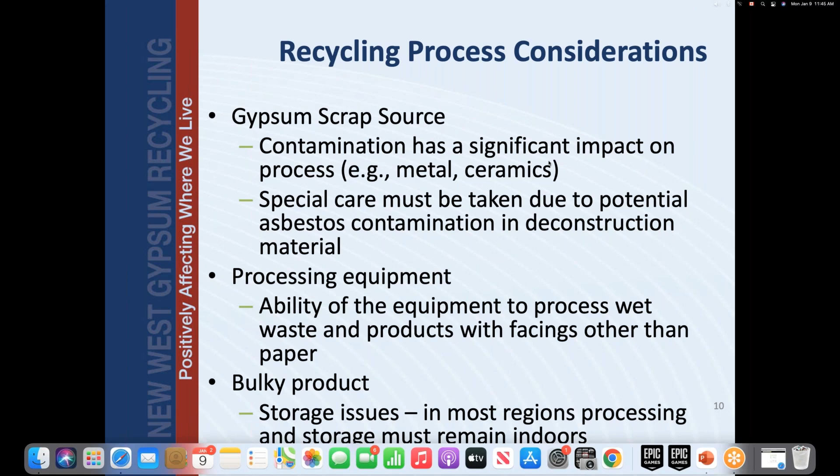Gypsum is a bulky material, so you are going to need space to actually store it. You need space for your incoming. You need space for your recycle. You need space for your paper. And you also need space for trucks to be able to turn and offload. So those are all things to consider if you're going to start recycling.

Some of the outputs, talked about this earlier, supply and demand. Don't take in more than you can handle, right? Because you may create a bit of a blockage along the line, like you take in too much material and you don't have enough outflow, then you have to tell your customer, sorry, I have to stop. Then that disrupts the market, then they may go take it elsewhere. So you really need to manage your incoming and outgoing flows.

At some of my facilities, I actually have a schedule, and they schedule an hour and a time when they can come in, because I only have the capacity to process so much. Knowledge, like you need to know what's in your market. You need to know which manufacturers are selling into the market, because there might be certain additives in their boards, right?

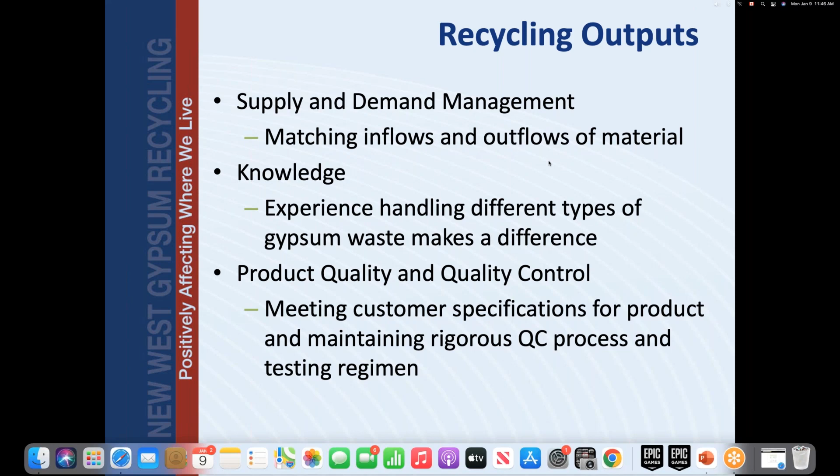Like how old are the homes in your market, or were they built in the 40s, 50s, and 60s? So that gives you some knowledge if there's anything hazardous that you may have to deal with, right? So you really need to go look at your market and to really know as much as you can before you start.

Product and quality control. Typically, this is met by most of the manufacturer customers.

Am I running over time, Jennifer? You just have a couple more minutes, sorry. Yeah, no, I'm almost at the end. Well, I don't know about that, but all the slides will be available. He has a lot of good points, but go ahead. Keep going. Okay. Okay, now,

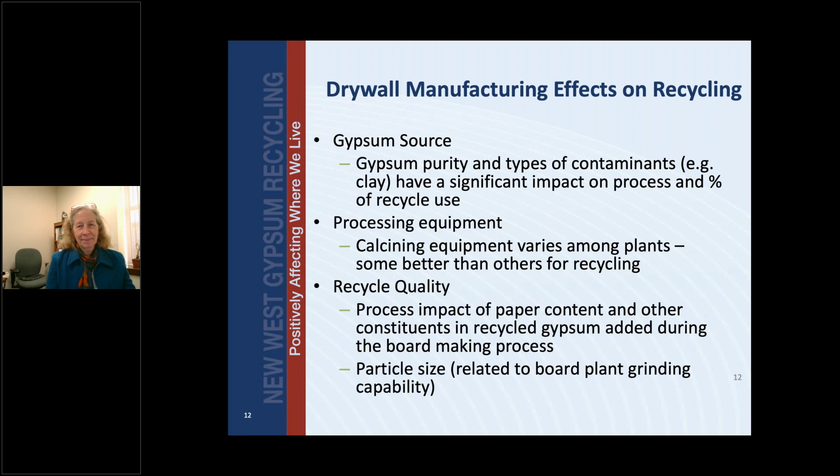When you're making recycle, the manufacturer is going to have their specifications, so you got to do everything you can to meet that, like quality content, particle distribution, paper quality, right? This is our first set of equipment back in 1985, powered by a tractor PTO, and this is our standard set of equipment today, where we're able to make any particle size which a manufacturer may need in this plant based in Germany.

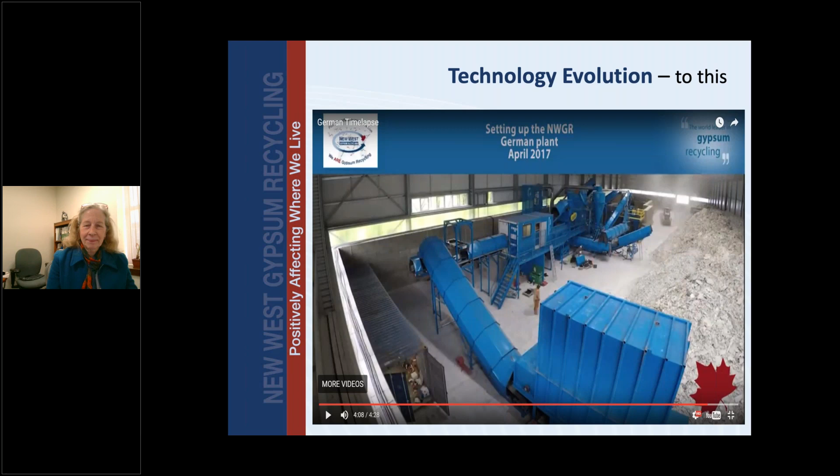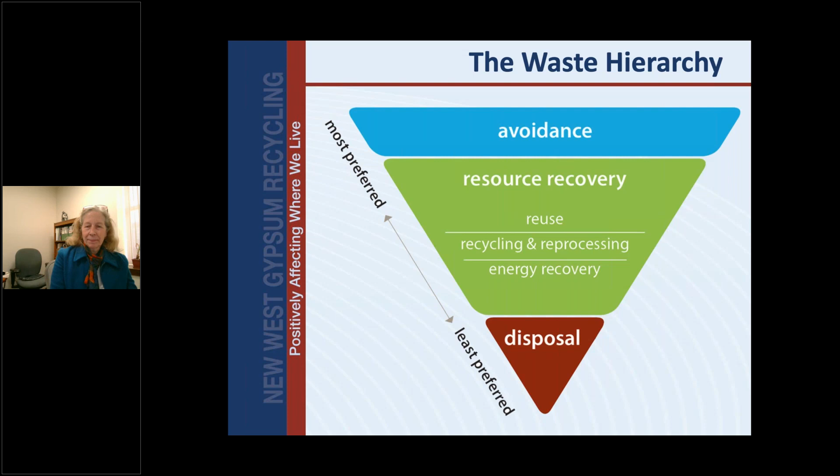Waste hierarchy. Everyone here should be more or less familiar with this. Avoidance, resource recovery. It's about putting it in the best home possible, right? We are a closed loop recycler. Now, downcycling or beneficial use, it'll never be gypsum again.

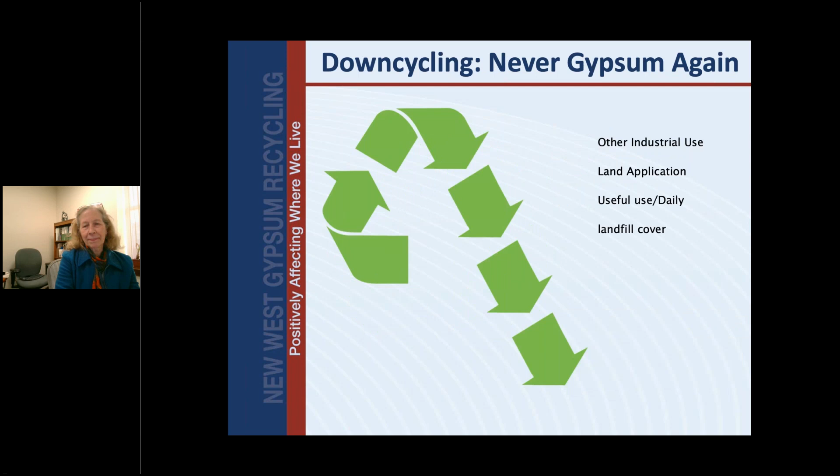This is like environmental versus capital, and you need to de-risk the use of recycling materials. Build in some criteria where it gives the manufacturer some leeway if they do happen to have an exposure, and never go for less than green.

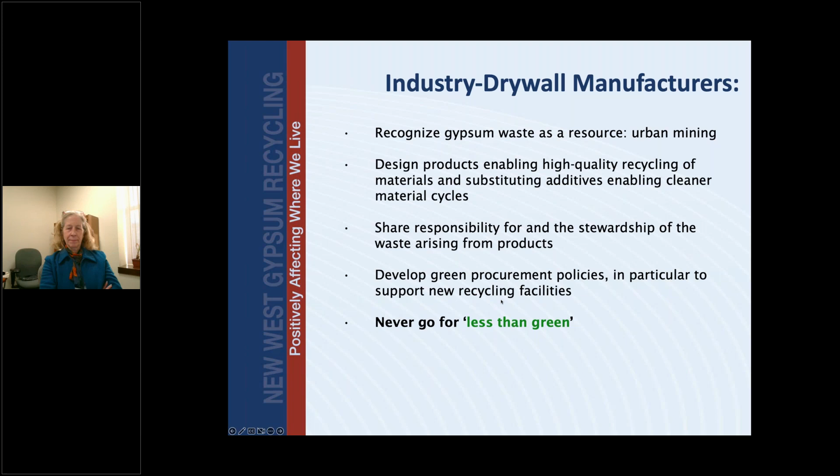For the industry, gypsum manufacturers, recognize that it's urban mining. Design products that are able to handle high quality recycled material. Share responsibility and steward the waste arising from your products. Extended producer responsibility. And develop green procurement policies, in particular in support of new recycling facilities, never go less than green. So all the stakeholders need to work together.

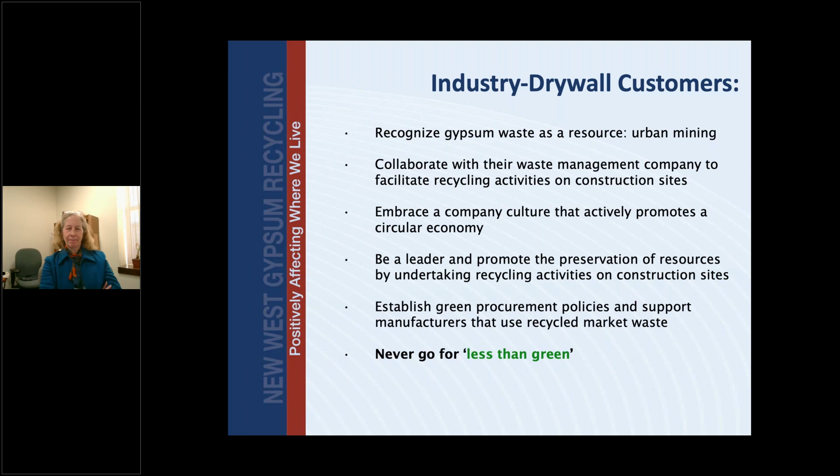And to all the customers, right? You need to collaborate with all the waste companies. You need to embrace that culture of the circular economy, because gypsum is the poster child when it comes to the circular economy. And you have an opportunity to be leaders in this market, and we have the responsibility to help establish green procurement policies and support manufacturers for use of recycling in the end market.